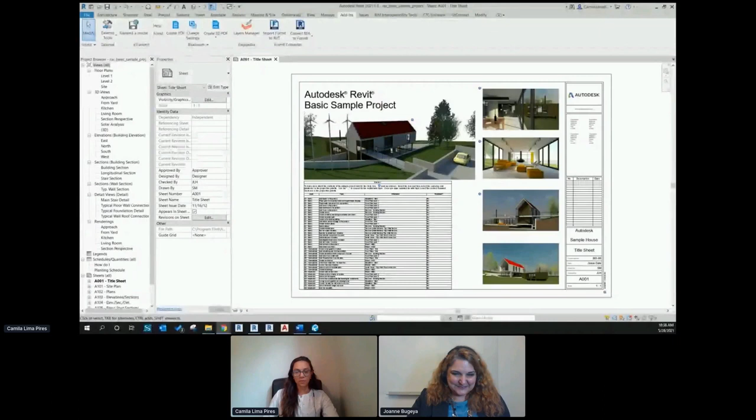To start today's presentation, I want to touch base with one integration that not a lot of people know about, which is Bluebeam in Revit. With that integration, it's automatically installed when you install Bluebeam. It installs in Revit as this add-in here.

With that add-in, you can create PDF files, adjust settings, and create 3D PDFs as well. One of the settings I want to point out is under settings, there are a few things we can do. We can create the PDF straight from this, and Bluebeam recognizes the sheet size automatically.

The other thing is exporting rooms to area measurement. So if you're going to create a set of drawings that you'll start using the area measurements later in Bluebeam, this tool allows you to export the area as the area measurement, and then in Bluebeam you can modify that later. It's an interesting feature that not a lot of people know about.

It can save up some time, since we're talking about time management here, because we end up creating those areas in every single set of drawings, correct? So what else is in here?

There's some security settings, so you can establish that at an early stage instead of assigning that in Bluebeam. There's stuff like the password that you can require, and if I check this on, you also have some other permissions in here that you can use.

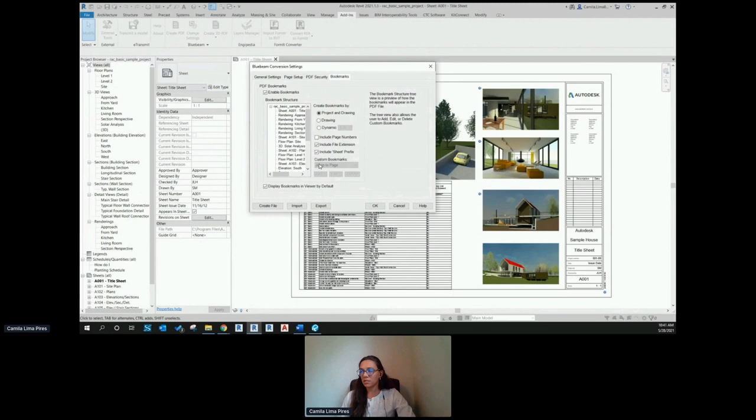The other settings we have here will be the label. Under the general settings, we have the option to use the sheet name as the page label. I've caught myself a couple times doing this, where I have to go and set up the page label based on the sheet name and sheet number, just because it's easy for me to navigate through the pages in Bluebeam. So I found this handy as well.

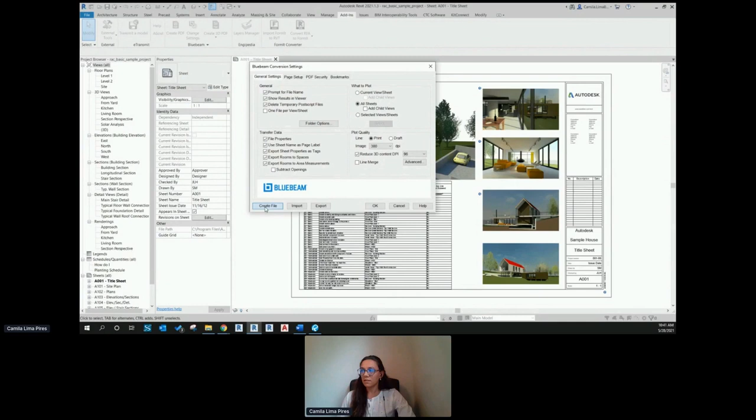Once you're done with all the settings, we can create the file. If I click here, create file, I could have added the password. Let me go back here and check this. So I can create file, and then Bluebeam starts creating the PDF file. It's going to request a folder location, so I'm just going to save here.

If you want to take a look at the advanced settings of how the image is compressed, some of the resolutions, you also have access to that information here. I'm just going to click save here. This is just going to save on my desktop, and it's going to process that and open Bluebeam automatically.

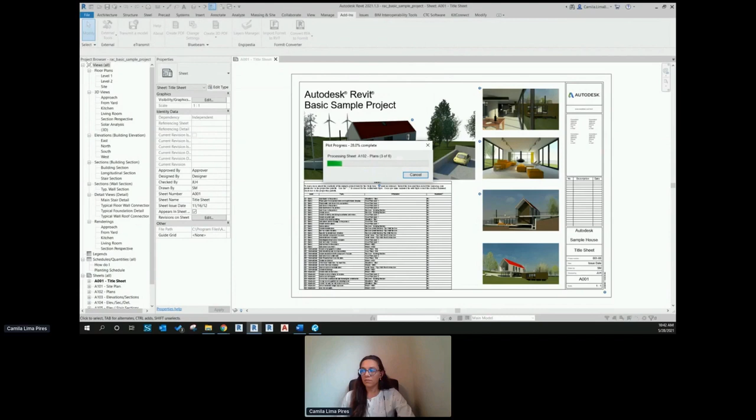The goal we're doing this is, one of them is because I want to use the area measurements for the future. So right here, while Bluebeam is loading, I have this set of drawings, and this is basically what we are going to start discussing - how we're going to create the area measurements, but also make that easier and use the data that we need, linking to other files as well.

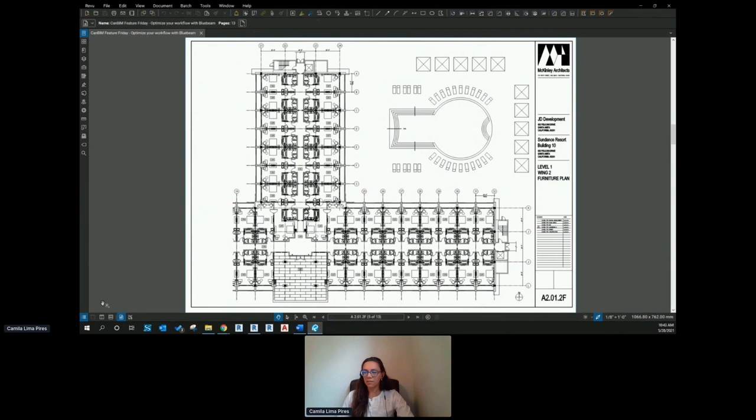In this set of drawings, one of the things I want to point out is the markup list, located here at the bottom of the screen. You can also expand it through here. With the markup list, this is a place that automatically tracks all the markups placed on a PDF, including the author, the date it was placed, any comments associated, and any status as well.

So if I place any markup here in this drawing, I'm just going to place one. It's very simple, it starts tracking that information. One thing we can do is modify the subject of this markup, because we can use the subject and label to filter out information.

This is formatted as a table, and each row represents a markup that has been added to the active PDF. Each column shows a particular piece of information about that markup. In here, we can also hide some of this information.

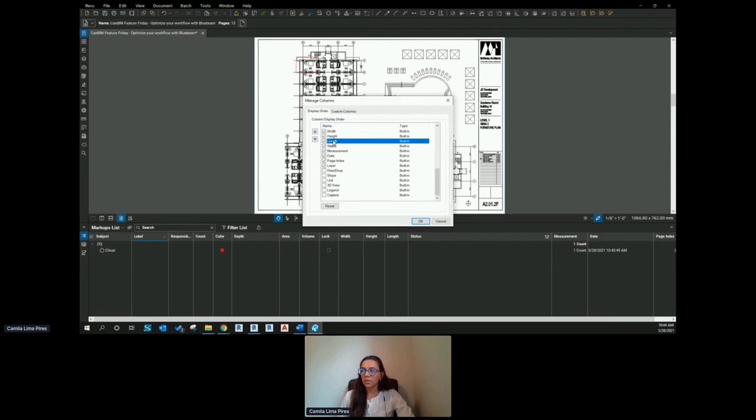Under columns here, we have this list of markups. So if I uncheck author, it will hide from the column here. If I go to manage columns, I also have other columns that might not even be showing on that list, so just be aware. Maybe you have a custom column you created, or want to use certain data that's not showing on that list - it might be because it's not in that display order, and you can change the order from here. Or if you'd like to change order, there are simple ways, you can just drag and drop to move those columns and expand their sizes.

So I'm just going to hide this responsibility column, just because I wanted to keep this clean with the information that we actually need for the presentation today.

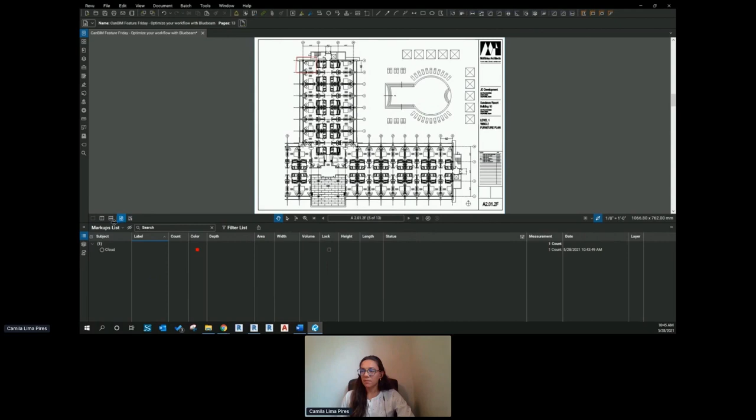Awesome. I briefly mentioned custom columns. So under the markup list, columns, and manage columns, we can create custom columns. The goal here is there are different types of columns you can create - you can create choice, text, formulas, add numbers. Within the choice, you can add a value for each component, which is something we're going to do today. With that value, you can actually use that for your estimation.

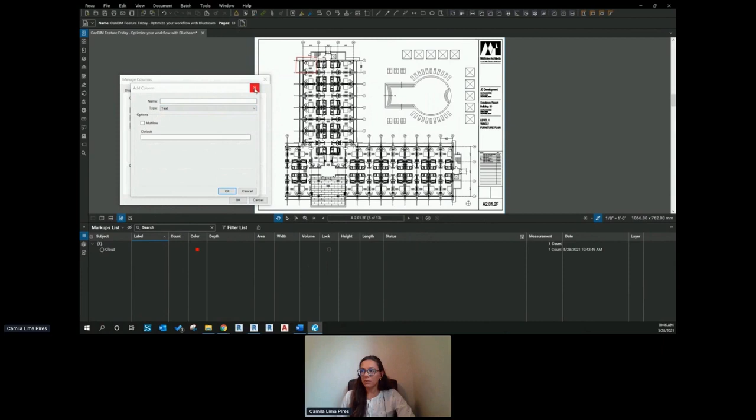To start with, I am going to start placing a couple of area measurements. I already set up the scale of this drawing, so I'm just going to click on area. Basically what I'm going to do is create 3 areas - let's say one for timber floor, one for tile, and the other one for carpet. And I can simply start placing this as a kind of common thing that we end up doing.

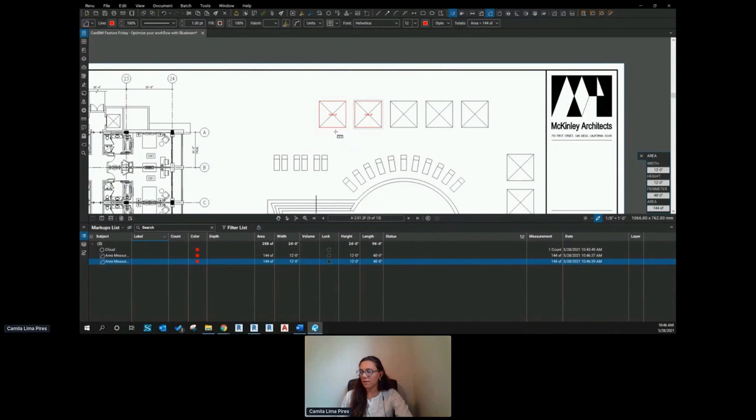We just placed those, but in here there's not really a lot of information. I can't really use it to filter or add a better value. So what I'm going to do is select this and edit some of the information - I want this to be a floor area measurement, and this will be timber floor.

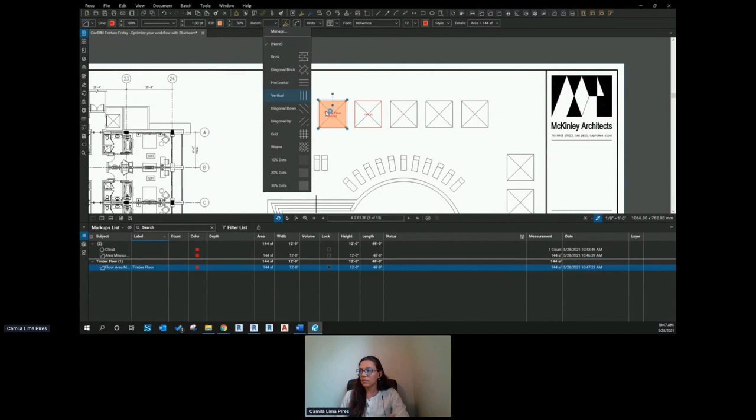So in the properties, you want to change the fill pattern - let's say I'm just going to pick this orange, change the opacity, it's kind of nice so you can see the background. You can add a hatch as well, so I'm just going to pick this vertical one here, and then we can start changing the color.

That was Bluebeam trying to open that PDF I was creating. I'm going to change the font as well, and the outline - I'm just going to pick something that's kind of on the same location. So we updated here, and also updated under the markup list.

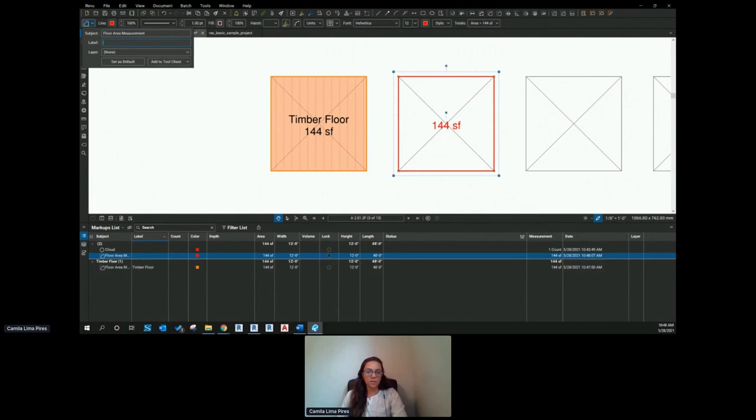I am going to do the same thing for this second floor here. So I'll say this is going to be part of the floor area measurement, and this will be carpet floor. I am going to change the outline, add a fill pattern.

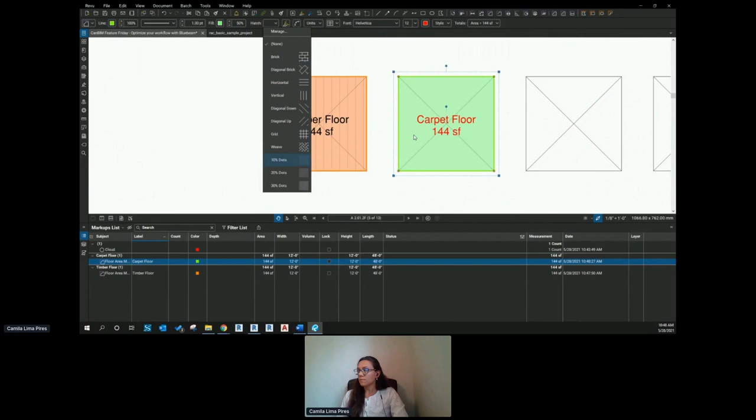And change the hatch as well. The reason I'm using the labels again is because I can filter that information in the markup list. So if I want to just see the type of floor in here, that's why I've decided to use the labels and also keep track in here on the screen.

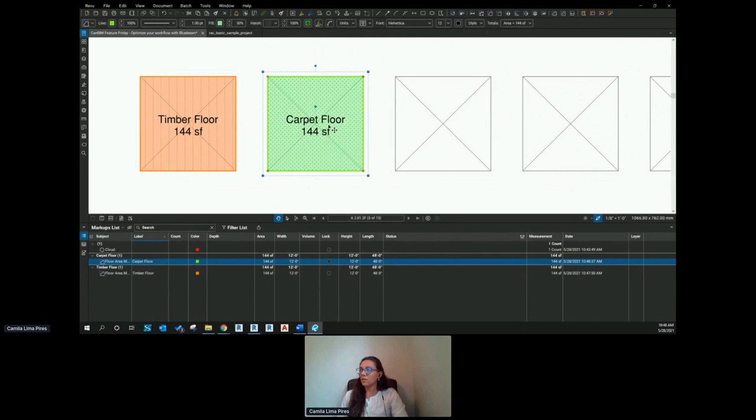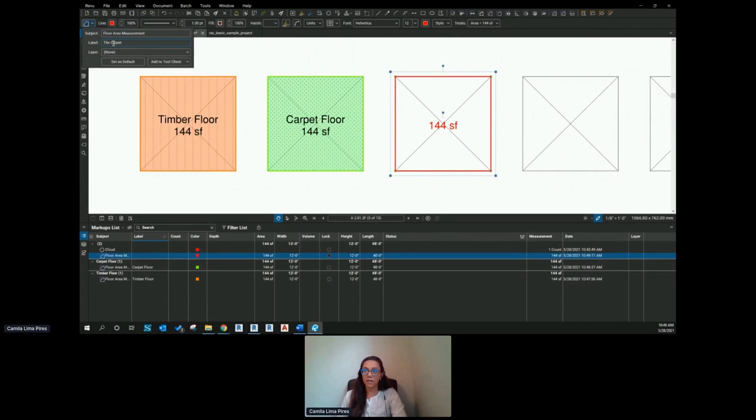So I am going to create one more - this might be a lot of setup right at the beginning, but once you have that information, I'm going to show you later how you can save this for later use. We can use certain tools to save those markups for later on, so that would be handy because then you don't need to do this over and over, you just need to do it once. I said carpet, I meant tile floor.

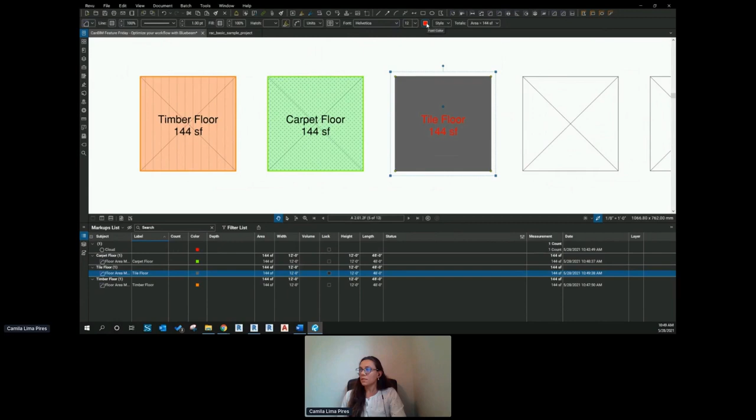And I changed this one here. Opacity. And I'm going to add a, well, let's get this diagonal one here.

Okay, so now I have 3 floors that I want to use as the start of my markup list. After I created these 3 floors, now what I want to do is start assigning more information to them, because so far all I have is just what I can see here. It's the length, the width, the height. What it actually says is that the length is actually the perimeter of the floor, and also have the area here. But so far, I can't really use this information.

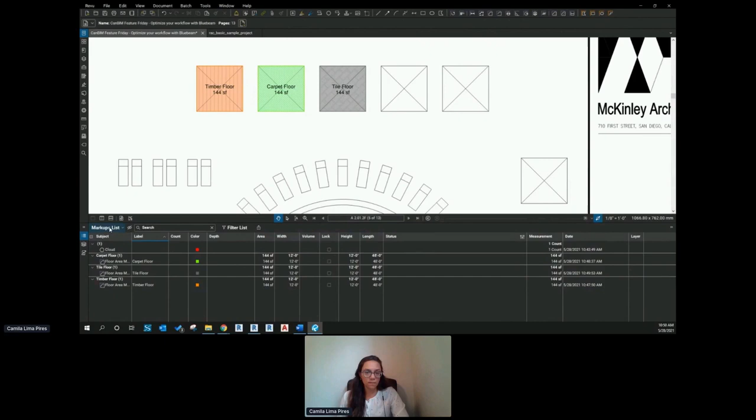So what I'm going to do is create a custom column. I'm going to go to manage columns, custom column, and I want to create one for the floor type.

And this will be a choice, and the reason why is because I want to assign values for this. So as a choice, I'm going to add timber, that's my item, and I want to assign a numeric value. So just for the presentation, I'm going to say timber is going to cost 50. And I am also going to do this for tile, and assign this, let's say 40. And I'm going to create another one for carpet, and assign a numeric value of 30 here.

Then I'm going to click OK, and I click OK here. I'm just going to drag the floor type column closer to here, move this one away. So now to assign this floor type, all I have to do is go here, double click, and assign the correct floor type. So I want to use carpet here, this one is the tile, and this one is the timber.

So the next step will be, now we want to use this value so we can calculate the area for the floor type. So I'm going to create another custom column here. That will be the overall floor cost, and this is going to be a formula.

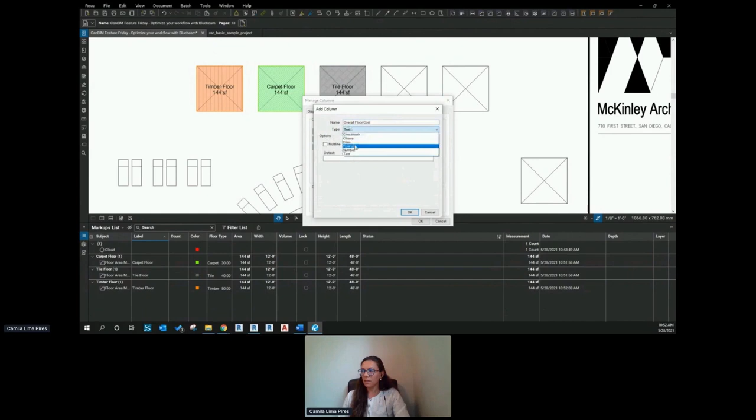With the expression, all you need to do is start typing here, and it's going to show up a list of the variables. We want to use this information by double clicking, because it's case sensitive, so if we don't type it correctly, the expression might not read it correctly. So I'm just going to use the symbol to multiply here, and I'm gonna start typing floor type.

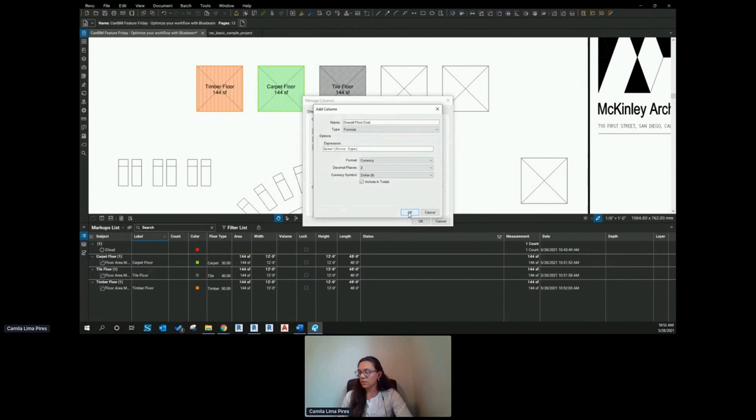So I see it here on my list, I double click, and then the format, this is gonna be currency. Notice that you can also add percentage, or it can just be a normal number. For currency, you can pick decimal places, dollars, and yeah, I want to include totals. So I'm gonna click OK and OK.

It's gonna pop right here at the end. I'm just gonna bring this close to the area, and you notice that it automatically adds the numeric value in here. So what it's doing is just calculating the floor area by the cost. And if I start updating, so if I move this here, it updates the floor area and also updates the overall cost.

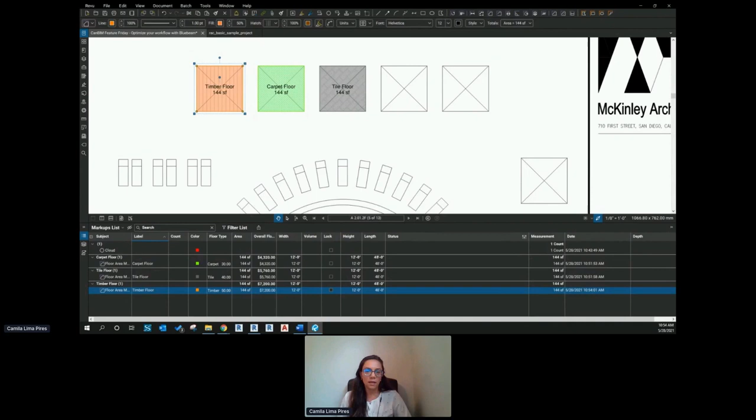So you can do the same thing to calculate, let's say, electrical tray that runs along the building. You can create a measurement that's called a poly length. So I'll show you that under tools, measure, poly length. So we can use the poly length and do a similar idea.

So instead of a poly length measurement, I could say this would be electrical measurement. You can add a label here and call it electrical, because that way you can keep all of them in one spot and then maybe filter and do a summary with that information. Changes some of this functionality, so I'm just gonna add a thickness in here.

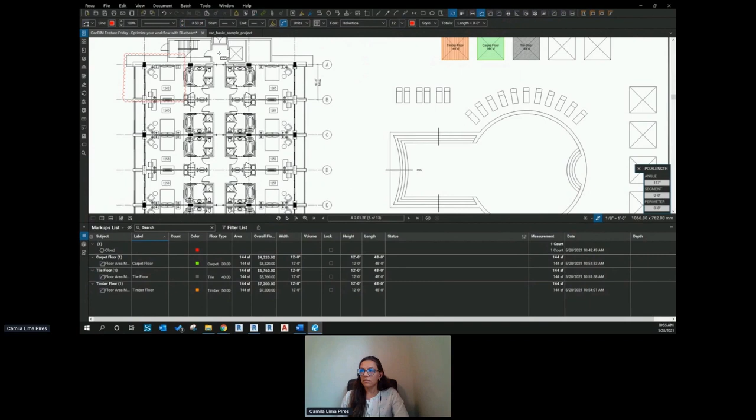And then you can start placing. So let's say the electrical tray runs along here. So once I place, oh, my bad. I double click to place, and now I have that information in here. So I'm just gonna redo here quickly.

So now I also have this one. What we can do is create a custom column for one that says that's the run type, add the electrical tray value, assign it as 20. Then I add a mechanical duct as well, and use the same poly length to measure the ducts, adding the same assigned value using the custom column. Then we end up seeing we can create an overall cost for the MEP cost that runs the length multiplied by the run type, and you'll have that information in the totals.

So this is also something we can do with the markup list.

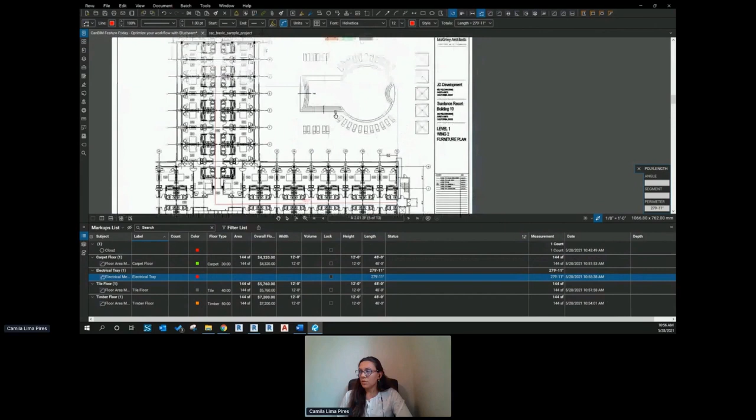The other way that we can assign, you can use this floor area cost, another tool I want to show, the dynamic fill. Using the dynamic fill, you can fill up an area, including some areas that have this odd shape.

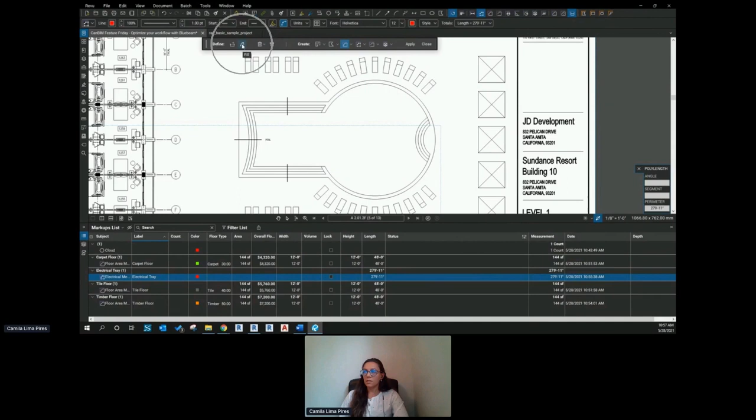The dynamic fill will be over here, and first you need to assign which of the floor types you want to use. I'll say that's the timber floor, and then you can use this little bucket and start painting the area. It might go over a couple of areas. Once you're done, you click apply, and it fills up the area.

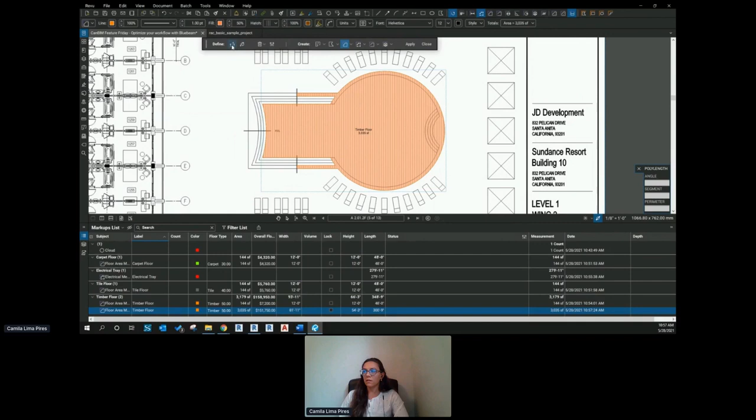I see there are some areas in here that kind of went over, and if I don't want that, I can add a line so it blocks that area and doesn't fill up that information. So I can use the dynamic fill as well.

Because I already used one of the tools that I created, it ended up at the bottom of the markup list, and you can see that it calculates the area. So that's kind of nice and organized. I'm going to hit close here.

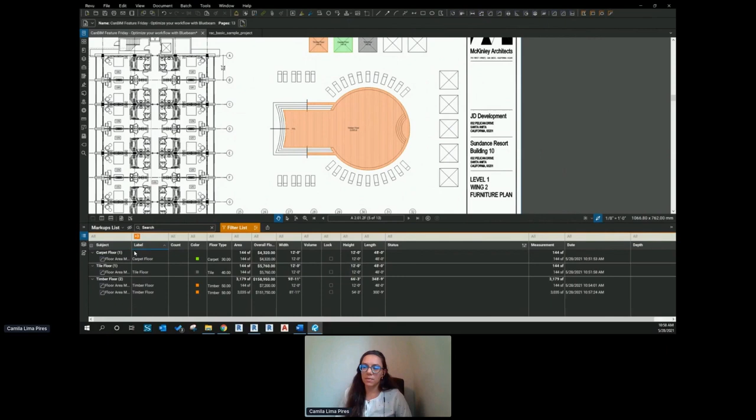So I did mention the filter. If I use the filter here and click filter list, I can select which ones I want to see on my list and organize it a bit better for summary purposes. You can just show that information, and you'll end up with a lot more markups than I have in here. This can be a really good way to filter your information. I'm just going to leave that in there.

The other thing I want to show is the tool chest. In the tool chest, we've chosen those markups for later use, and we can save this information. The way we do it is, under the tool chest, under recent tools, I have those ones in here. But if I close Bluebeam in this session, everything I created under recent tools is going to disappear, and then all your work is gone.

So what we want to do is save this. I can either select here and change to the floor finishes—what I did is I actually created one for floor finishes. I even have one little one here for myself. But that's what you can do under the tool chest: you can create your own here.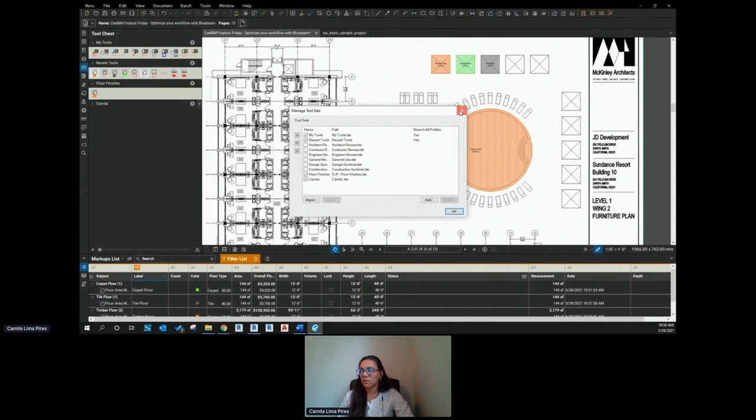Or if you have a company standard one, which is kind of nice, you can use import company standards and export. So let's say one person is responsible for creating some of those tool sets, and they just send it out to everyone in the company. Now everyone has the same type of set, so we're kind of organized.

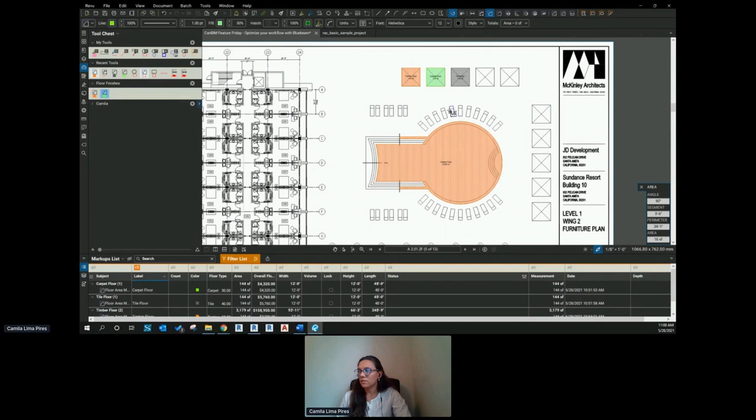So one way is I can drag and drop. I can also right click in here, add it to tool chest, and select the one I want. Notice how it kind of changes here—there are two different modes. If I click here, it just places exactly the same shape and format I used. If I double click, it changes the properties, and now I can use the properties but with a different shape. So if I had another shape here, I can place the area, but it saves the properties without the same format.

Let me save this one here as well. I'm going to right click, add to tool chest for finishes, floor finishes, and save it for later on. So that's pretty handy.

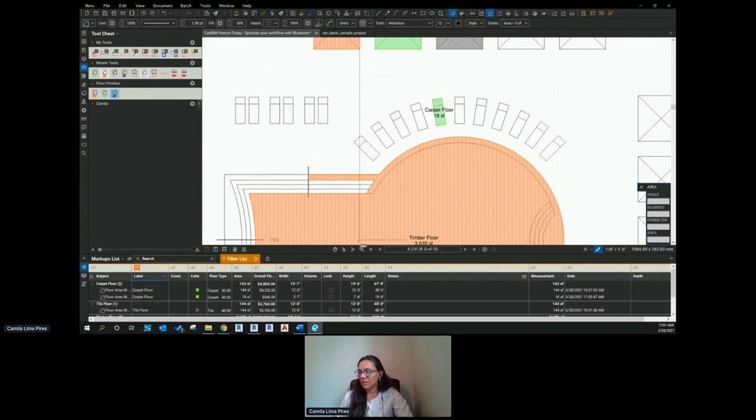Now to the summary part. After I created my floor types and already started assigning them on my drawing, I can create a summary. There are different types of summaries we can create in Bluebeam: there's the PDF, there's the CSV. They're sort of similar, but the data that comes out is in a different format.

With the PDF, you can actually create one that contains thumbnails, and you can add hyperlinks to that. And with the hyperlink, you can even attach that summary to the PDF set.

So let's say it goes right to the bottom. And then with that summary, you can actually click, because it has the hyperlink, and it brings you back to where the markup is located.

With the CSV, which is the one I want to focus on today, it's going to create a CSV file that can be read in other third-party programs like Excel. And you can also create what's called the quantity link, and that's our goal here at the end.

So I am just going to create a CSV summary. And with the CSV summary, here under columns, you can pick the columns that you want to show as well, so you can select just the information that matters.

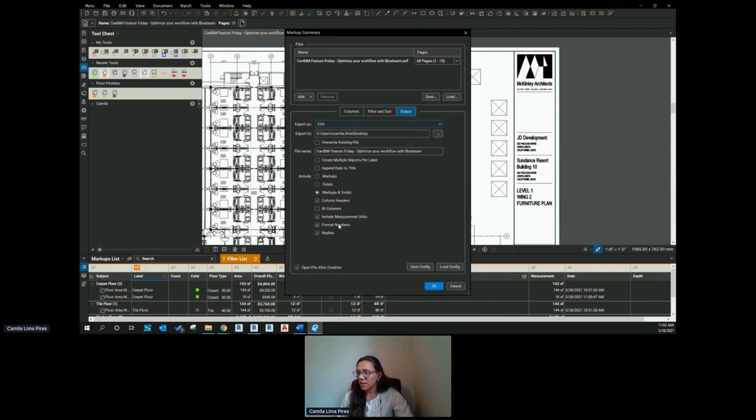Under the output, we have here the location where it's going to go—that's fine for now—and the file name. You can create multiple reports per label, and I can append date. I'm just going to leave in markups and totals, and the important columns and headers for this. I'm going to click OK.

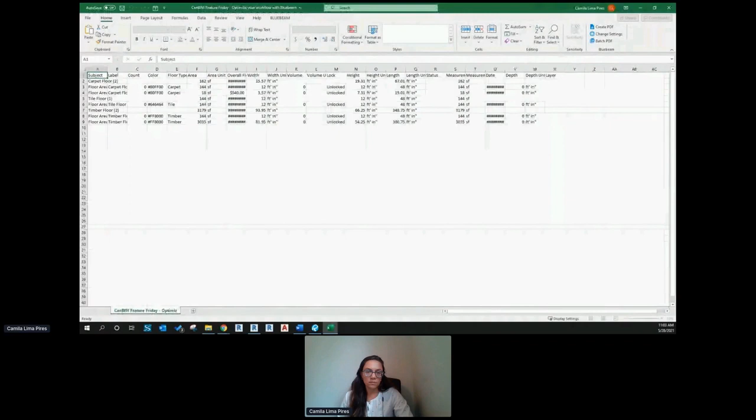And it automatically opens that here. So I'm going to expand some of this information so we can read everything. In here you see there is the floor type, the area.

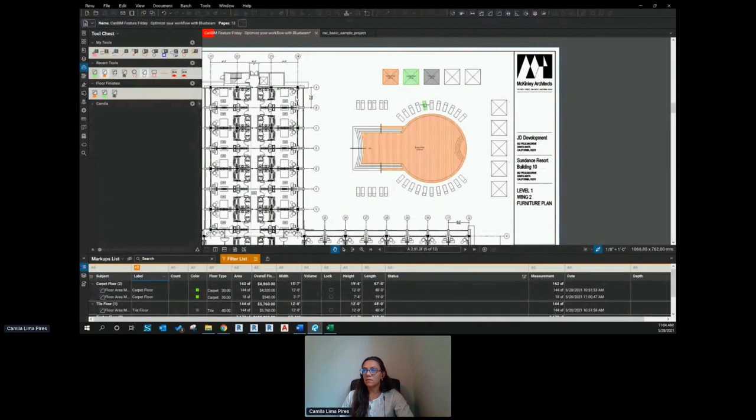So what I want to do is edit what's called the quantity link. With the quantity link, it's going to actually create a link between the PDF set and the Excel spreadsheet. So first, I needed to save this Excel spreadsheet.

In Excel, I am going to use the area under the floor type. So here I can do quantity link and then create. I'm going to add—and that's why it was important to save the file—because now I needed to browse through the location of that PDF.

Just going to load it here. I'm going to click OK. So here, what I want to do is actually assign what data this is going to pull from.

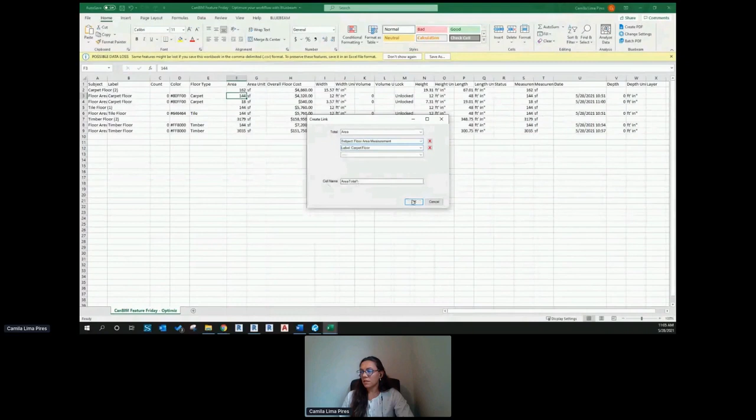So I want the area of the subject floor area measurement. And I can even keep going here and say this is the label for the carpet floor. You can even give it a cell name—I'm just going to leave it there for now—and I click OK.

So now if I go back to my PDF, I just want to put this here on the side and hide this guy here.

So if I go here and update the carpet—let's say I'm going to update the area—you notice that it updated on my Excel spreadsheet as well. And so that is the important part.

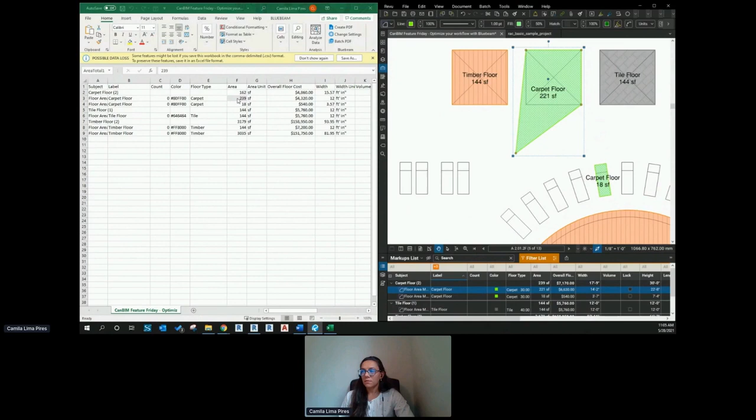So now I don't really need to worry about doing this again and again. If I keep adding more carpet area, let's say I go back here and add another area, that information is updated here, but also updated in my Excel spreadsheet.

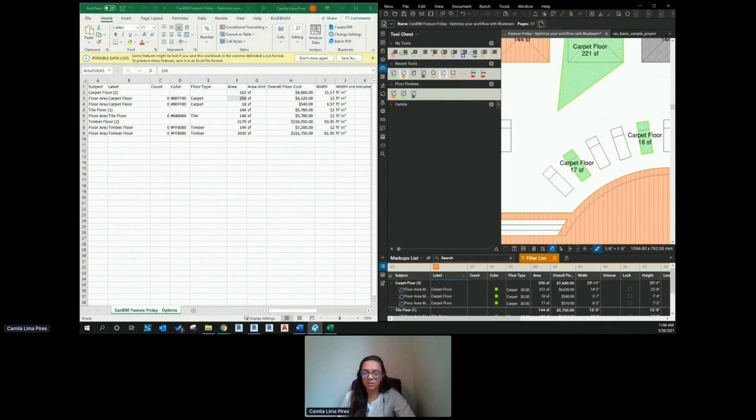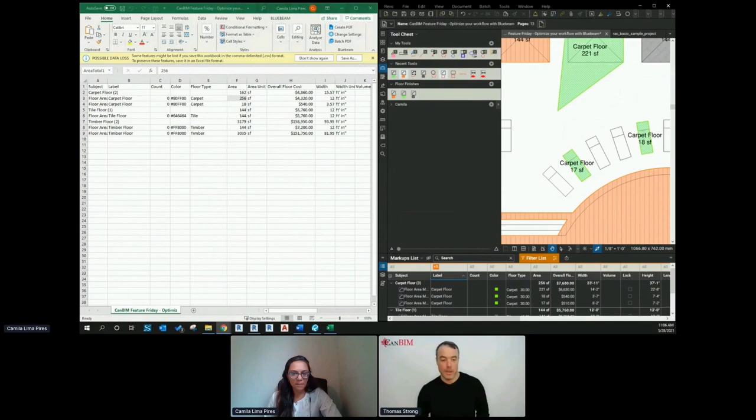Okay, great work, thank you so much for that. Really appreciated the insights into the product like that. And these types of videos are great online, because anyone looking to get familiar with the product or trying to improve is going to be searching around for answers to these types of questions.

So I don't know if Sergey's listening—Sergey, you got to publish the questions in the Q&A panel there, because I don't have access to do that, I think. But I just had some other questions.

I don't know if Joanne's going to come back on. But from your experience, SolidCAD is obviously selling a lot of Bluebeam across Canada. Who are the main customers of the product? Is it a split between people in the field working in construction doing coordination work, or estimators, or who are the main users?

I would say everyone. From the architecture point of view, we have architecture consultants using it. We have architecture offices as well—they use a lot of Bluebeam. I think the big thing is we don't see them using Bluebeam to its full potential. So there's a lot in Bluebeam that we can do.

Like the quantity link—it's not that hard to set up. It's something that you can improve your workflow with for sure, and for time as well. Imagine if I have to redo that summary report every time I modify something in my set of drawings. So we can definitely improve a lot of things using Bluebeam. I think it's very wide.